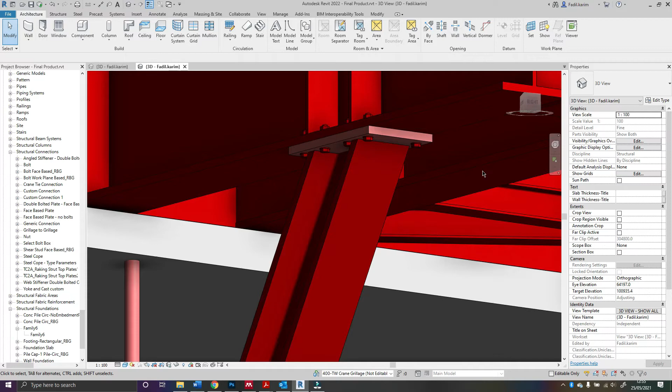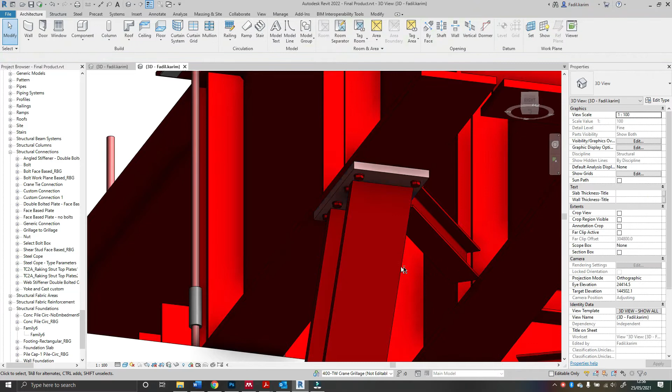There seems to be this idea in BIM that making something fully parametric and 3D takes a long time and should cost a lot more, so it's easier to do it in 2D and get it over and done with. That is not true. I believe making things fully in 3D parametric is more the responsibility of the engineer, because it's so much easier to actually do it that way.

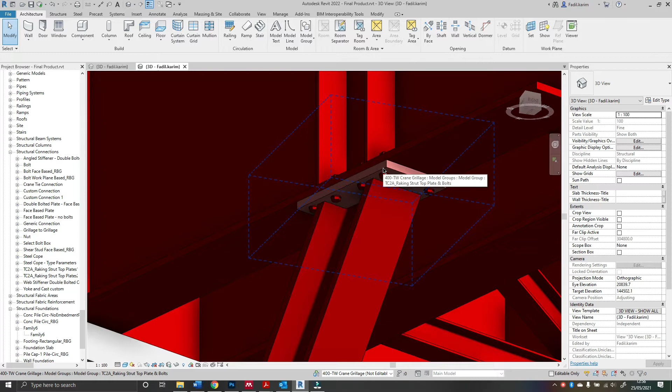Let's say I have this plate here and I want to increase the size of the bolts, the spacing, the edge gap, or the size of the plate, whatever I want to change. I want to be able to just select it and do it in the clicks of a few buttons within this project. I can't do that with this one in particular, but I'll show you how now quickly. This video won't take long.

Let me get my timing up here. We should be able to do it in under 5 minutes to create the whole plate fully parametrically. So it's been 1 minute now, so by minute 6 we should be done.

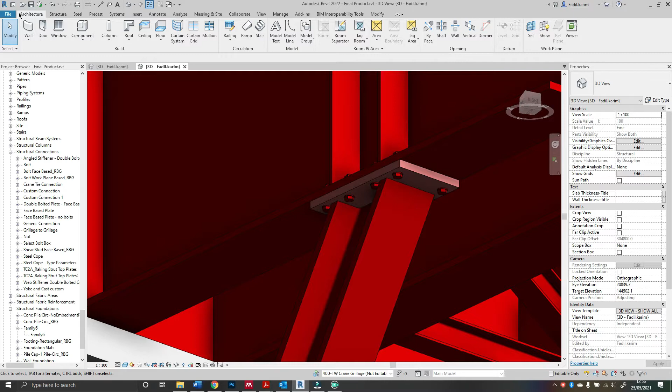Let's just do it for this project, and I'm going to stick it on this face here. Not going to make it exactly the same because I've only just opened this and don't have my view set up to align it properly. Well, I've got these here. It's been another 20 seconds, so by 6 minutes 20 we should have it.

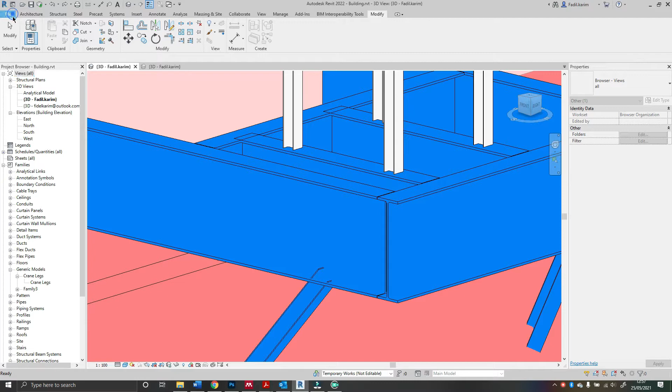File, new, family. No, I'm not going to do that. I have my own custom template, which I'll show you how to make in another video, but this is what you need to be doing: making simple templates that everyone can use. They're user friendly and people will want to use them, and without realizing it, they'll learn a lot about making families just by using a template where everything has already been set up.

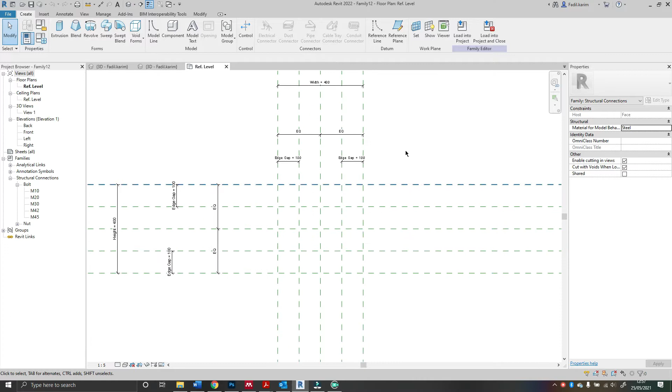So I've already got all my parameters in and all my reference planes. All I need to do is put my extrusion down, select lines, lock, lock, lock, lock, TR for type, TR for trim. Boom. We'll go to the front and remember to do this step.

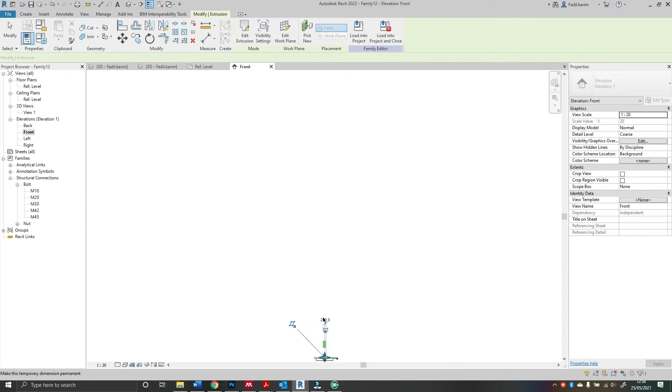Lock it to that reference plane, which is where my plate face is going to be. Select it, and I've already put in a material parameter, so I tell this to follow the parameter.

Now I bring in a bolt, which I've preloaded in, place on work plane there, and edit the work plane to the plate face.

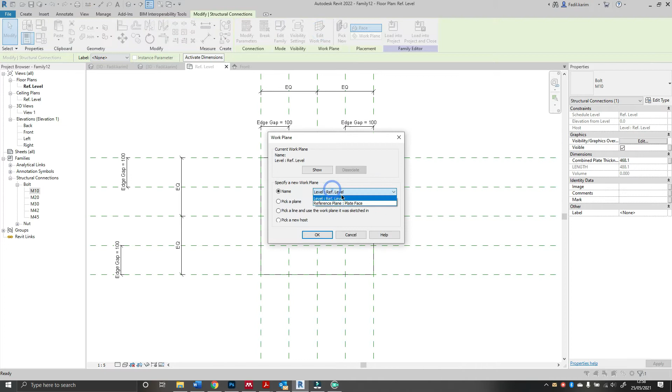Select it, type AR for array, boom, select it, select that, and say, well, you know what, I'm going to undo that. I'm going to select the bolt and just change this parameter to the bolt length.

Which I actually forgot to set up now. Oh no, I did. Yeah, the bolt length is going to be the thickness plus the thickness of the second plate, so whatever plate this attaches to.

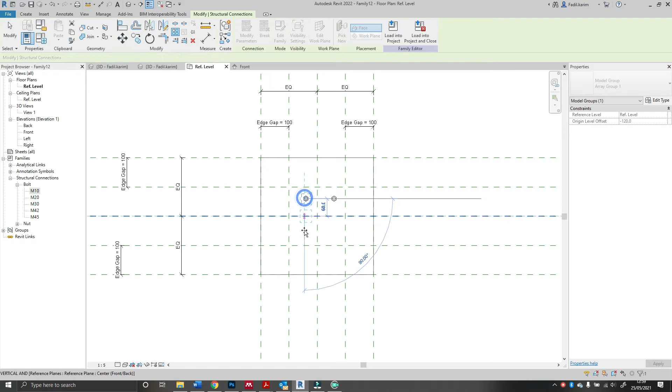And I'm actually going to copy that one. I like to keep these separate. Select this, type AR for array. Same with this one.

Apologies, I need to add the size label. Yeah, there you go. Array. Boom.

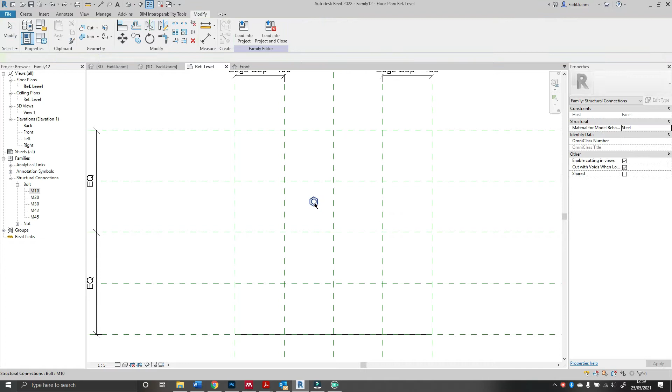Array each one. Select this, select that. Add the number of bolts to the label.

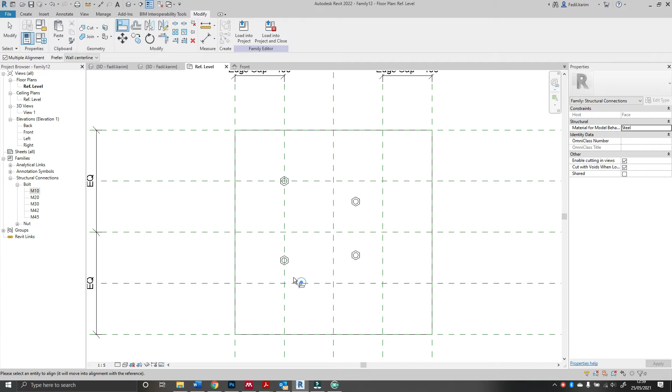Yeah, I did add the size label to that one, so this should be good. Now I'll align it to this reference plane, which is the edge gap. Oh, I've got multiple align on, so there you go. That is us done, I believe.

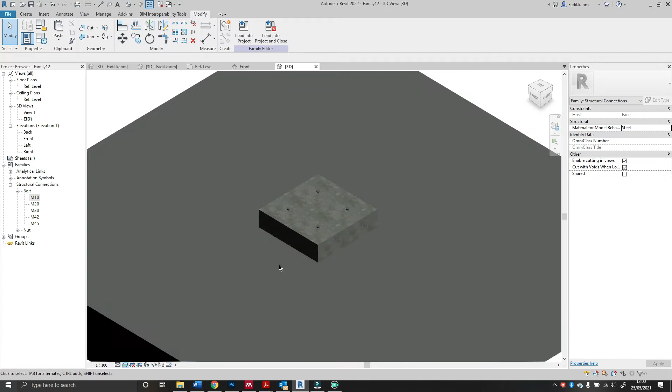So if I go to 3D view, set this to realistic. Yep. Let's just actually put it on wireframe so you can see where the bolts will end.

Now let's just say I want to change a few things parametrically. Let's say a wider width, 600 by 500, thickness—so that's the plate we can see, that thickness, let's say is 75 mil.

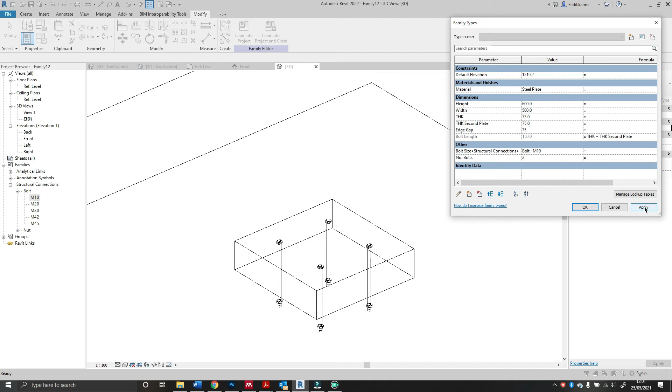And the second plate, move that one up. Well, I'll keep edge gap up here after thickness. The second plate will be 75, and then the edge gap, which is the gap from the edge to here and from there to there—which you can keep separate in separate x and y coordinates if you want—we'll call that 75, and we'll hit apply, and everything adapts accordingly.

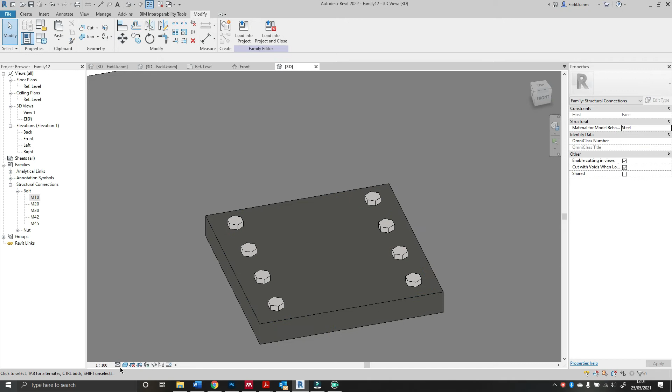Boom. And let's say I want to increase the number of bolts, or change the bolt size, increase the number of bolts, and let's say I want four now. Boom, done. And of course, if we look at realistic mode, this has the plate material implemented into it.

And we're at 6 minutes. There you go. Now I'll load it into the project. Building is the one.

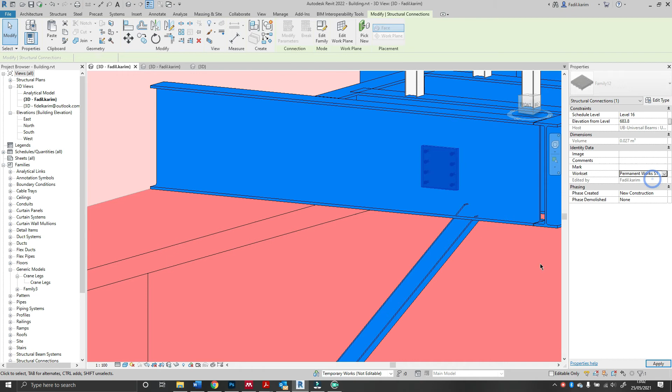And I can place it on any face because it's a face-based template. Let's just make it stand out a little. There you go. And I can move it around, manipulate it, or edit it.

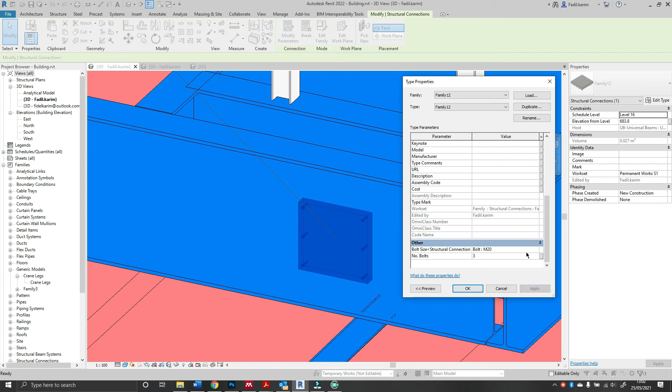Edit the sizing again. Let's say 700 by 750 by, I don't know, 100 thick plate. Edge gap 50. Bolt size, we decide M20, and we only want 3. Okay, well, M20 doesn't look realistic. Let's put M40. There you go.

And so the second plate would be the thickness of this I-beam. So I'm not going to work that out—you can do that for yourselves on your own project. And it would stay tight to that if you did put that in.

I'm trying to think about what else could be said about this, because I had a good point on this one.